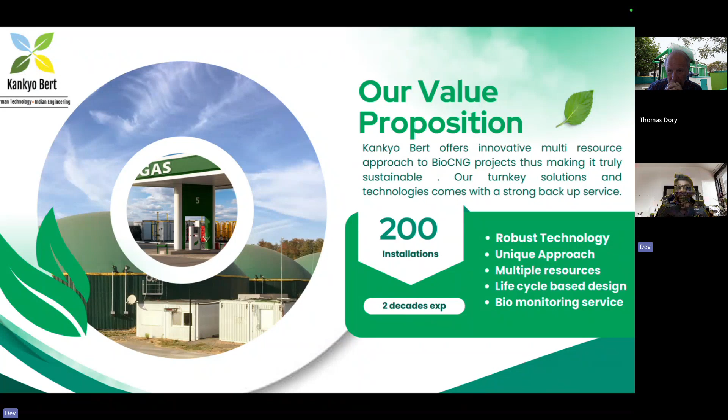With our two decades of experience handling different types of substrates and technologies, we are trying to narrow down and bring in all these robust technologies under one umbrella, so that it can handle various types of feedstock and give maximum yields.

In India now, the main substrate is Napier grass. Everyone started growing Napier grass on their own as an energy plantation, then harvesting it at regular intervals and using it. This is one of the evolving agro feedstocks which can grow very well in the tropical climate.

But unfortunately, there are not many biogas plants which were working with Napier grass. Of course, now for the past two years, there are a lot of plants coming up using this Napier grass, because it also requires a large amount of land for cultivation.

The challenges with respect to the feedstock, not only Napier grass but any agro feedstock, are that it has a high lignocellulosic content and very low digestibility because of this, since breaking these fibers is not easy. It can also form a scum on top of the digester if not treated properly, and the lignin content, which forms a barrier to digestibility, is another issue.

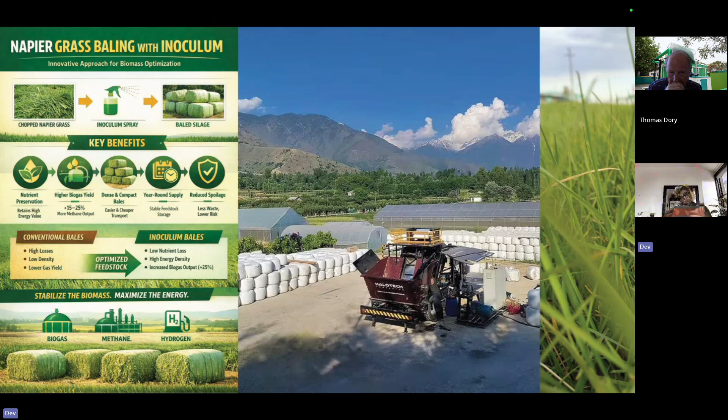Unlike silage, where you have base and compaction with covers on top, resulting in loss of organic content through leachate, this baling system is quite advanced—all the biomass is baled in proper polymeric material, and then we do the debaling later when it is fed into the digester.

And the feeding also has to be very consistent. So what we are trying to bring in is another good German technology here with dosing tanks, which has conveyors that can also remove foreign particles. If there is some stones or mud, it can be removed at this stage.

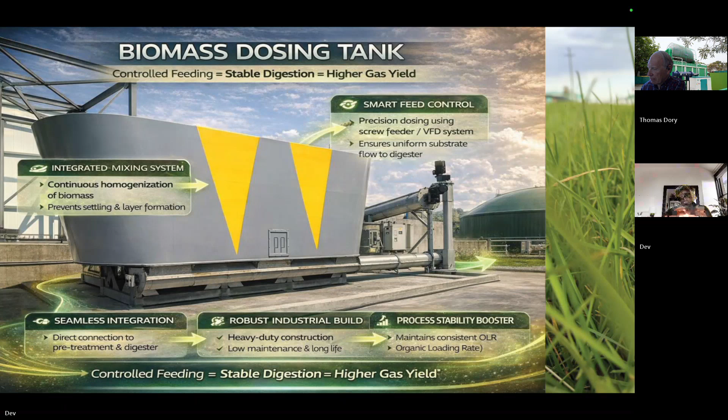And this will give a consistent feed to the digesters. So this is the first point where the debaled Napier grass is loaded here. And from this loading bay, we have the conveyors which would push this to the feeding system, ensuring a consistent feed going on to the digester.

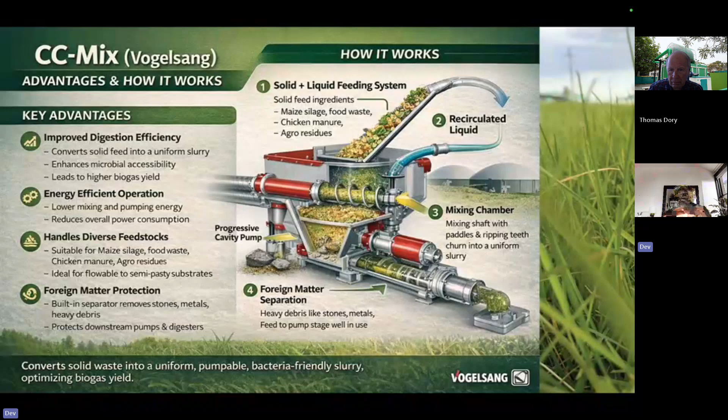So here we don't go with complete slurry tanks where we have to add water and do the mixing. Instead we use a CC mix. The CC mix would take the solid feed as well as the liquid feed, and it will blend and form a slurry. So we can adjust the consistency, and either 10% or 12% consistency can be easily adjusted here.

This can also remove any other foreign matters like stones and metals, so that these things don't get into the digester and occupy the space. This is one of the major issues in many digesters - you get all these foreign matters accumulated at the bottom, and over a period of time it becomes very difficult to remove, and it will also drop the mixing efficiency.

So we ensure this because if you're handling about 100 or 200 tons of Napier grass, it becomes difficult to operate on a manual mode - you can't prepare a slurry of 10 to 12% manually, because there will always be an error. So it's always better to have this type of mixing system. That's why we have the CC mix, where it can combine the solid and the liquid and give the right ratio of slurry consistency which can be fed to the digester.

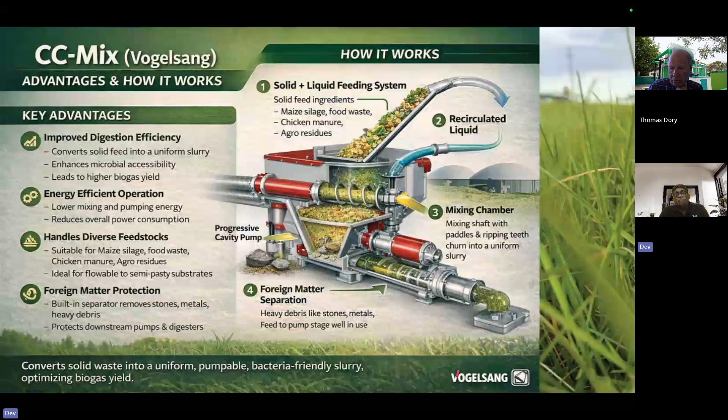And coming to the main digesters, we always prefer to offer glass fused tanks. These are not glass coated tanks, these are glass fused tanks, where in the manufacturing of these panels itself, the glass is getting fused into the molten metal. This has very good anti-corrosion properties, and is best suited for biogas digesters. It has a very long life, about 25 to 30 years, and can be built within a span of about 6 to 10 weeks.

And these are panels which come in a consignment, and we can just fix it at site. It requires minimum manpower and has a very long lifespan. And tomorrow, if you want to dismantle this, it can be easily done as well.

This has a lot of advantages compared to civil construction, because on the headspace we always have hydrogen sulfide production happening, and this hydrogen sulfide is highly corrosive and can attack civil structures. If the civil structures are not constructed properly, over time this gas gets inside and attacks the metal rods, weakening the structure, and there'll be loss of gas.

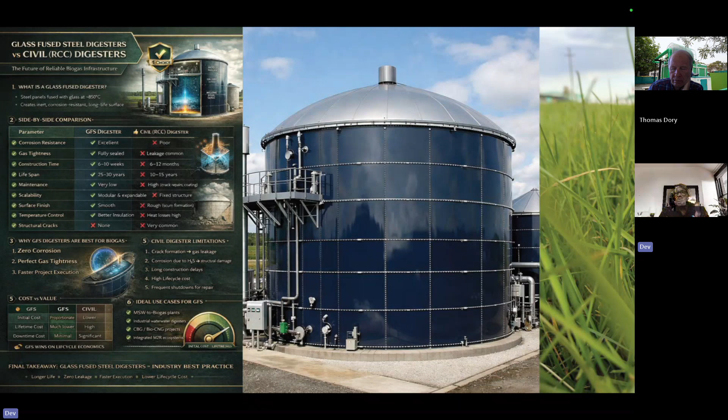So this is a very robust system now, being adopted by many other companies as well. This is a very standard feature in our system - we go with glass fused tanks, not glass coated tanks. So this is what we offer for the digesters. As far as the process configuration, we offer a two-stage digester.

The first stage is a thermophilic digester at about 55 degrees temperature, and the second stage is mesophilic, with heating carried out using a hot water system - a briquette fired hot water system. The reason for going with this thermophilic and mesophilic combination is that there is a phase separation happening, so it is easy to have process control.

Number two is that thermophilic digesters are very good as a pre-treatment for the lignocellulosic content, where they can break the fibers and digest them faster, so that the mesophilic downstream process can happen very efficiently. A combination of these two stages would also reduce retention times.

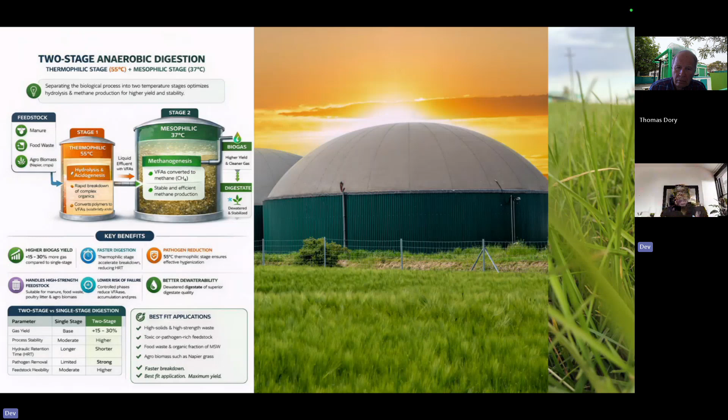Unlike large tanks, this requires a very small retention volume, so that is another advantage. You have space saving, faster digestion, and easier process control. And also you have a fantastic pathogen reduction. So this is the advantage of the two-stage anaerobic process, and we adopt this process for the main digestion.

For breaking down this lignocellulosic biomass, we have the first stage of fungi-based treatment, but we also have the ultrasound cavitation system, which is well proven and in the market for more than 25 years for different substrates. This ultrasound cavitation gives ultrasound at a particular frequency, which breaks the fibers further and makes it available for the microbes for digestion.

A combination of fungi-based and ultrasound cavitation will give the best results. Here a portion of the digestate is taken and recycled through this system, so that continuously the cavitation also happens in the closed loop. Combining this hybrid pre-treatment system, fungi-based and ultrasound cavitation, we expect a gas production increase of additional 30% from the conventional process. So we get 30% more yield of biogas, which means more productivity.

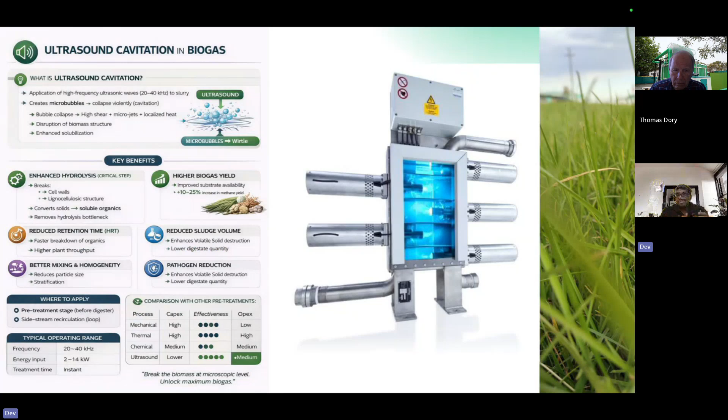Then coming to the hydrogen sulfide systems, the most important thing is removal of the hydrogen sulfide. Downstream, we can reduce the hydrogen sulfide through wet scrubbing, dry scrubbing, or biological scrubbing. Here we follow a very unique system, an air dosing system, which is very popular in Germany. A small amount of air is injected into the headspace, which reduces the hydrogen sulfide into elemental sulfur. This elemental sulfur gets into the digestate and comes out as the digestate. So the manure is rich in elemental sulfur, which is also good for agriculture. We remove close to about 98 to 99% of H2S in the headspace itself.

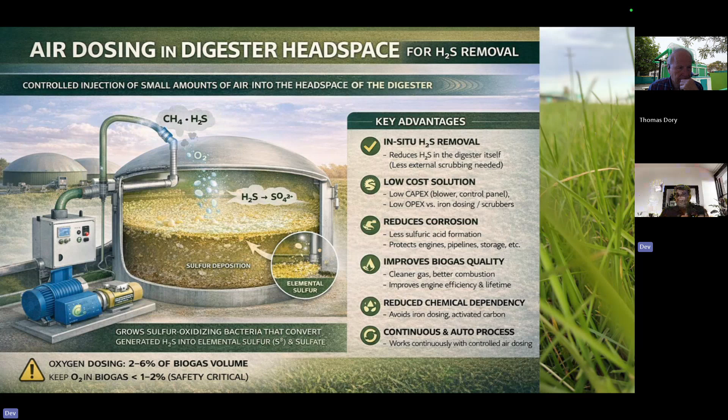Downstream, we do some small polishing for hydrogen sulfide. Then it can go to the biogas upgrading plants, for improving the methane content. The advantage of this system is that it's totally automatic, with better reduction than any conventional system, not much maintenance, and no replacement involved. These are the advantages, and it's well proven. There are more than 1,000 plants in operation, operating successfully all over Europe, achieving these results.

Mixing is very, very important in a digester, so we felt that you should have very robust mixing systems. This is a gas ejector, what we call a gas lifter, a technology from Japan. We try to incorporate this in our system, and it consumes very little energy compared to any other mixing system in the market. This just consumes one-fifth of the energy required by other systems.

The patented process here is that you inject a small portion of gas at the bottom of these ejectors, and this forms a very turbulent mix, ensuring that the digester is completely mixed, because this gas mixing ensures there are no dead spots. Unlike in conventional mixing systems, there is always a chance of dead spots in the digester where the mixing cannot reach. But this will totally mix it in a very sequential manner.

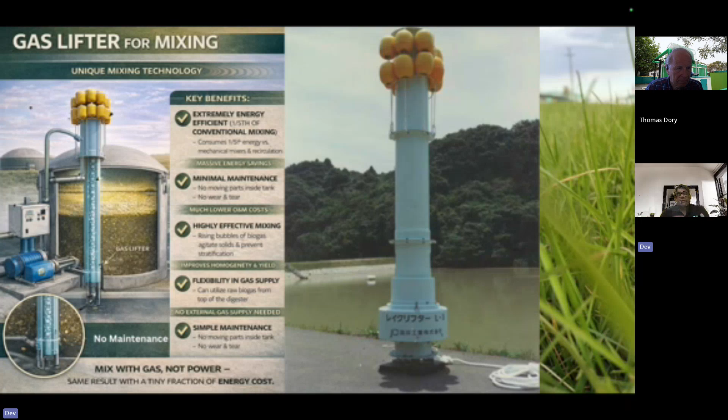This is just fixed inside, and since it's a polymeric material, you just fix it and forget it; you don't have to worry about it. We just keep injecting a portion of biogas in a sequential automated control sequence, which purges the gas inside and ensures 100% mixing is happening inside the digester. There's no maintenance, because there are no moving parts in the system, and energy consumption is just one-fifth of conventional systems.

For biogas upgrading, it depends on the quantum of BioCNG you want to upgrade to. We normally offer the amine-based absorption system, where methane purity is very good, up to 99%, and methane recoveries are up to 98-99%. This is what the project developer also looks for, because we don't want to go for a PSA or VPSA system, where the recoveries are not more than 90%. So we suggest that amine-based would bring more gas and more recoveries, which are beneficial for the project developer.

So we stick to the amine-based system. In some cases, we also offer membrane-based systems, but membranes need replacement after 5-6 years. Amine-based is quite robust, because it's mainly used in handling many types of sour gases in refineries as well. So there's a very good track record for the amine absorption system, and we prefer to offer this. The CO2 can also be captured, liquefied, and bottled, and it can be sold as industrial grade or food grade.

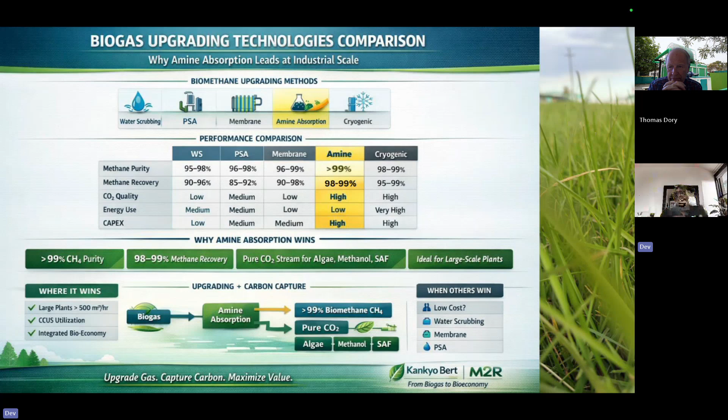The amine-based process gives the best outputs, and CO2 can be upgraded to food grade and industrial grade. It's a bit energy intensive, but we have an internal energy recovery system that ensures the energy given to the system is recovered back in the process and used for other heating requirements. This way it's well balanced, and integrating the heat recovery process makes it quite economical.

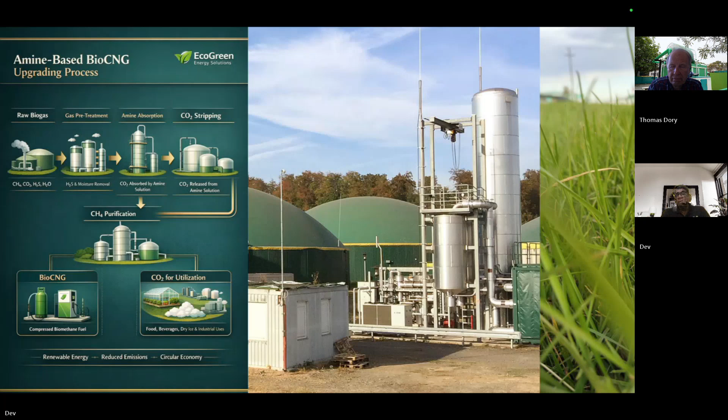We also have another option for using the CO2: our patented hybrid algae photobioreactor system, where CO2 can be injected to produce algae biomass. We can get two fractions here - algae protein as well as biodiesel. If you want sustainable aviation fuel, that is also possible, only the culture has to be different for that. So based on customer preference, we can go with biodiesel or sustainable aviation fuel, which are alternate fuels just catching up in the market.

So your BioCNG, the CO2 which is stripped out, we are now trying to convert that into a resource.

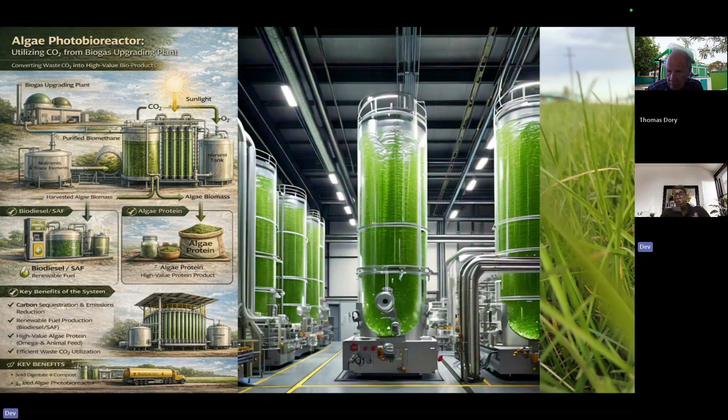Now coming back to the dewatering systems and the downstream digestate - this digestate, after dewatering, you cannot recirculate back into the process as it is, because it has ammonia content. If you try to recirculate this water for slurry preparation without treating it, the ammonia concentration increases in the digester and crosses threshold limits. So we want a robust digestate treatment downstream as well.

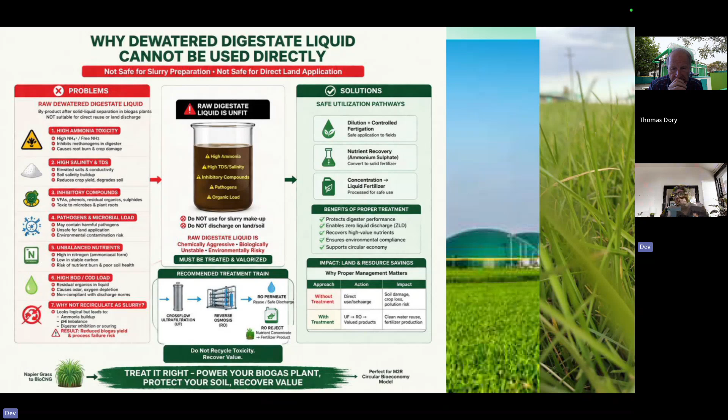Since ammonia is there, we want to recover this ammonia and convert it into ammonium sulfate. The first stage is the digestate liquid treatment process - a dewatering system which separates solids and liquids. The liquid part goes into a drum screen for removing fibrous content, then the solid part is taken out, and the liquid part goes into a membrane process. The concentrate goes back into the fan separator for dewatering, and the permeate goes for the scrubbing process for recovering ammonium sulfate.

So ammonium sulfate is recovered through a membrane process, and this ammonium sulfate is a very good fertilizer. The concentrate goes back to the fan separator for further separation.

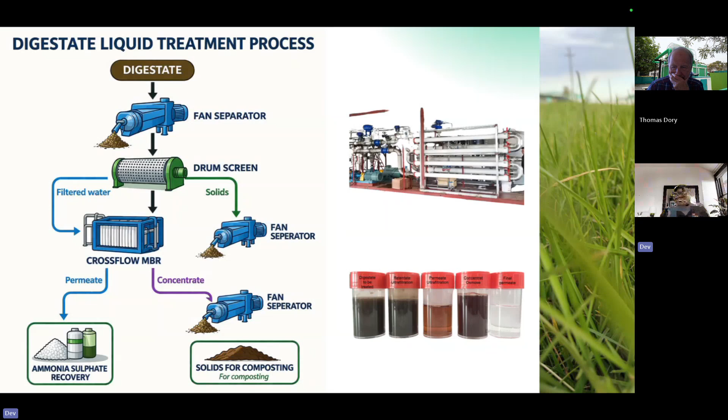We offer the membrane-based ammonium sulfate process, where the membranes separate out the ammonia, and we get ammonium sulfate concentrate by integrating it along with evaporators. We also concentrate the nutrients and recover the NPK nutrients, getting premium quality nutrients which can be sold in the market. So you get the nutrient concentrate as well as the ammonium sulfate - that's the advantage. From the ammonia, we are converting and recovering it as ammonium sulfate, and the nutrients are also recovered through this process.

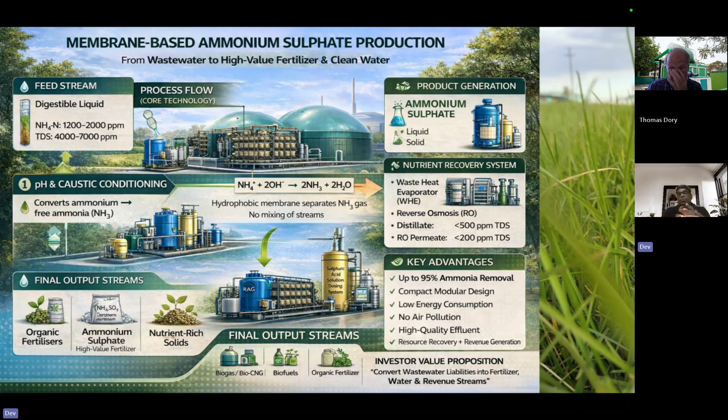The solid part from the fan separator can also be sold as compost, but we try to add more value by putting an in-vessel composting unit where composting or curing happens faster, and then this goes for humic acid extraction. Our process produces two resources: one is humic acid, the other is enriched manure in granular form. We are already tied up with buyers for this humic acid and enriched manure - there's good potential. Instead of selling as compost, you sell it as humic acid and enriched manure granules for higher returns. So we offer this as an integrated solution.

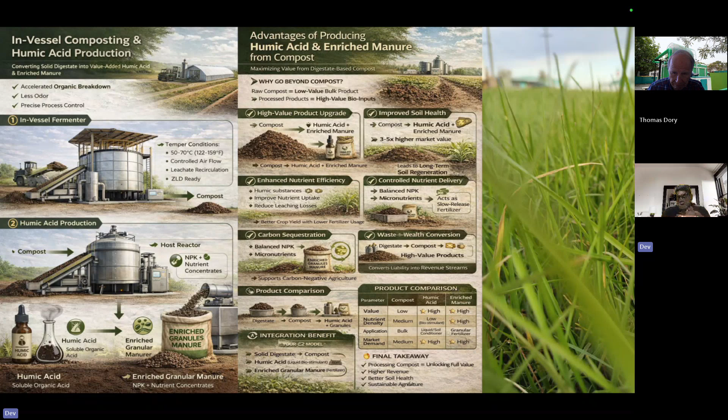Monitoring is very vital for any biogas system, because this is a biological process. Once it slows down due to process irregularities, it will take time to restabilize the entire unit. So it's very important to monitor critical parameters on an hourly basis.

We have provided smart monitoring systems with intelligent controls, which check the pH of the digesters, the temperature in the digesters, the oxidation reduction potential, and also measure the gas flow, the slurry flow, the output gas composition, and the moisture levels. Everything is periodically monitored, and whatever is monitored goes into a data logging system, then from the data logging it goes into a cloud control, which is managed by us, and from the cloud control you get the complete reports.

As a system builder, we get the data, and the user also gets this data, so we know the status of the digester. If there's any problem, we know well in advance so we can take remedial measures. This is totally packed, and we also get an AI generated report on the daily performance of the systems.

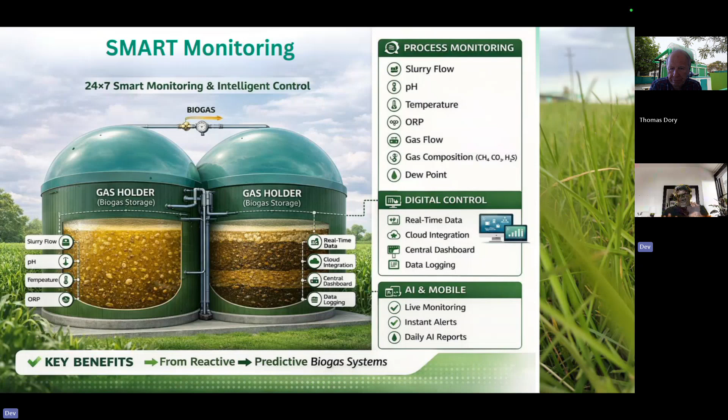All these come under the cloud control and smart monitoring process. To summarize, we don't just stick to the BioCNG. That's why we call it a 360-degree approach. We take care of the pre-treatment, the main treatment, the gas purification.

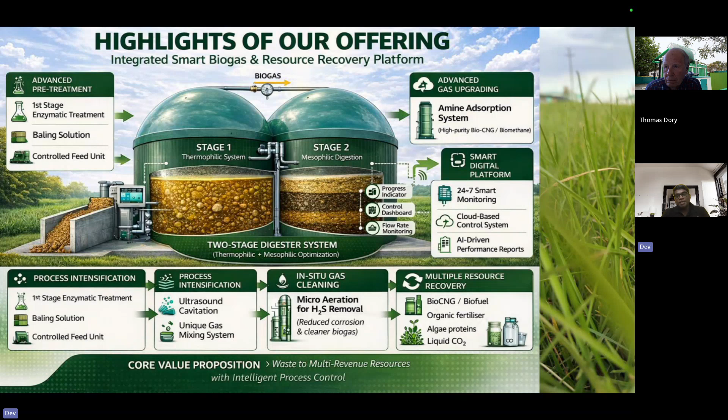We take care of the downstream digestate, and we try to take the maximum recoveries possible. So the highlight of our offer is the hybrid type of pre-treatment process, smart monitoring systems, two-stage digestion, amine adsorption, and air dosing in-situ H2S removal. These are the highlights of our offer, and the entire BioCNG project we call the M2R process - multiple resource recovery biorefinery process.

So the final one we get is BioCNG. Apart from BioCNG, we can get carbon capture, and we can produce algae. We get nutrient concentrate, ammonium sulfate, enriched manures in the form of granules, humic acid production, and biodiesel, biofuel, or sustainable aviation fuel. All these under one roof. So if you have multiple resources, that gives better financial stability for the project.

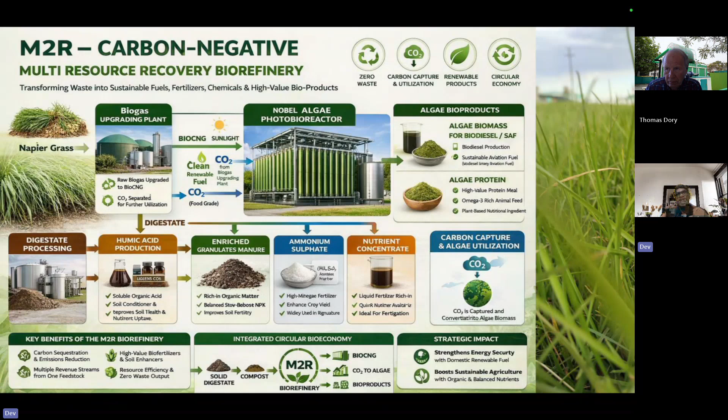We are also tied up with a company cultivating agro feedstocks, particularly Napier grass, where they assure us that from the conventional yield of 150 to 180 tons per acre per year, we can get about 500 to 600 tons per acre per year. We are working with them so this will drastically reduce the cultivation area needed, since cultivation requires huge area as well. This is a value addition - though we don't do the cultivation part, we try to align our project developer with this agro company.

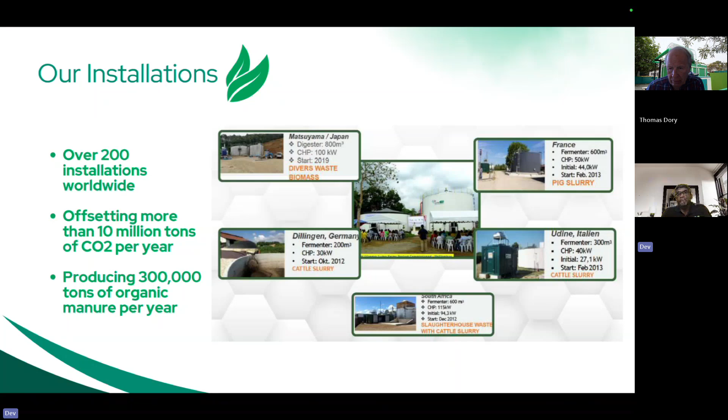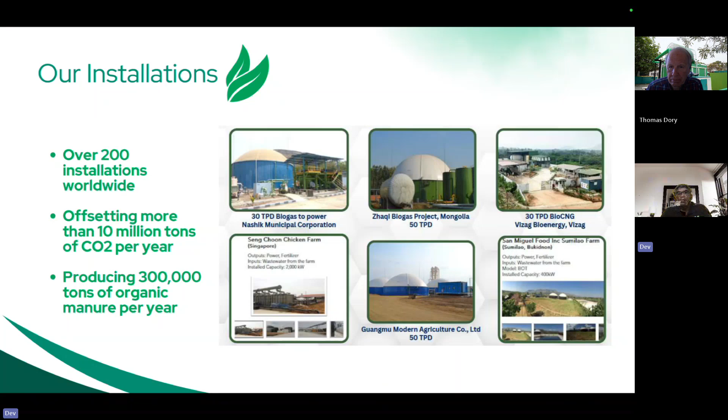As Kankyo Bert, yes, we do have experience in handling different types of substrates, and we are already present in about 22 countries handling different types of substrates, right from decentralized plants to centralized plants. We have the experience in handling this, and we are trying to bring our experience to the market and give this value proposition to our customers so their project becomes truly 100% self-sustainable. Thank you very much.

Thank you very much, Dev, for this wonderful presentation. I just want to add one more thing which we also do, and that is operator training. Lots of investors are focused on capex, saving money on capex, and cutting short on technology - or they even go for good technology, but frequently they are saving on the education of the operator. That's like buying a wonderful car, but having a driver with no driving experience, never having been to driving school, and putting him behind the steering wheel of this expensive car. So maybe you can say a little bit about what we are doing here at Kankyo Bert to ensure the operators are not these inexperienced drivers.

Absolutely, that's very important. Whatever technology we bring in, if there are no proper operators available, it becomes very difficult to operate these technologies. At our training center in Chennai, we train operators on troubleshooting, give them basic knowledge, and certify these operators. Even if the client wants to engage an outside operator, they have to pass our training before being employed at the facility. This is a value addition - we are creating the right resources to operate the plant, with training modules and hands-on experience at our training centers. This is a short-term course of about 4 to 6 weeks, giving them all the basic inputs so they can operate the systems very efficiently.